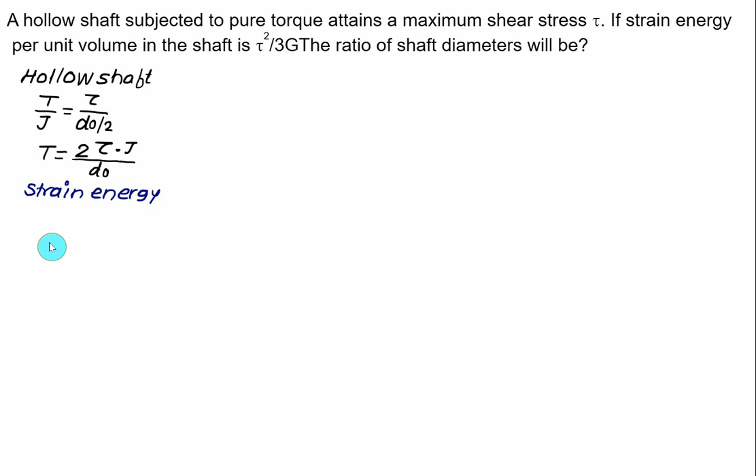Strain energy due to torsion is given as U is equal to 1 by 2 multiplied by T square multiplied by L divided by polar moment of inertia J divided by G. So let's substitute here. T is equal to 2 times tau into J divided by d0. So we get strain energy equal to 1 by 2 into T square, which is 4 multiplied by tau square multiplied by J square multiplied by L, and in the denominator we have d0 square, further divided by J and G.

So one of the J will get cancelled. We are left with one J in the numerator. This 2 also gets cancelled and we have 2. So we get strain energy equal to 2 times the shear stress square multiplied by J multiplied by L divided by d0 square multiplied by G. Now once we know the strain energy, we can calculate the strain energy per unit volume by dividing by volume, which is area multiplied by L.

So strain energy per unit volume is U divided by V, the strain energy density, equal to 2 times tau square multiplied by polar moment of inertia J multiplied by L divided by d0 square divided by G divided by volume, which is area multiplied by length L. So the length gets cancelled. Strain energy per unit volume is given as tau square divided by 3G, which is equal to 2 times tau square divided by G.

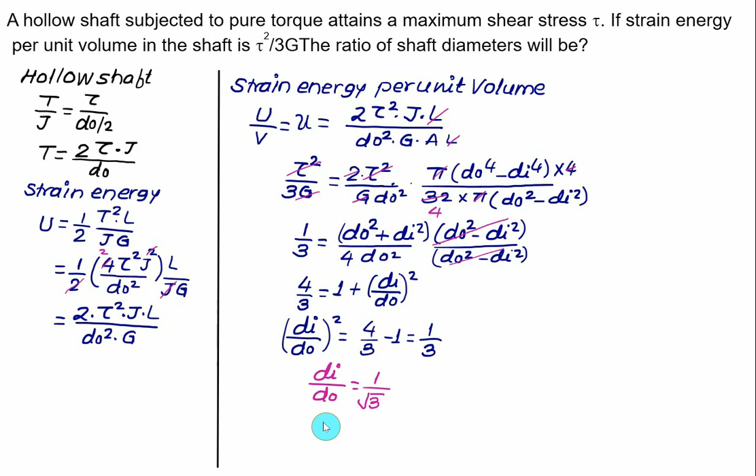A uniform torsion rod is subjected to distributed torque equal to T0, the torque per unit length. Derive an expression for the total strain energy stored in the rod. Express your answer in terms of T0, diameter d, length L, and the shear modulus G. So we have a uniform cross-sectional shaft of length L subjected to torque per unit length. Since the torque is variable, you have to use the method of integration.

We'll set the x-axis as the longitudinal axis here. At the fixed end, we have x equal to 0, and at the free end, x is equal to L. From the origin, we'll take a section at a distance equal to x. So we'll consider this section, and for this section, we'll find out the strain energy first. So this section we have taken outside.

This section is from the origin at a distance equal to x. Total length is equal to L. So the length of the given section is L minus x. This torque is acting in an anticlockwise sense, so you have to show here the internal torque. Let's represent the internal torque as Tx, which is a function of x. So Tx represents the internal torque.

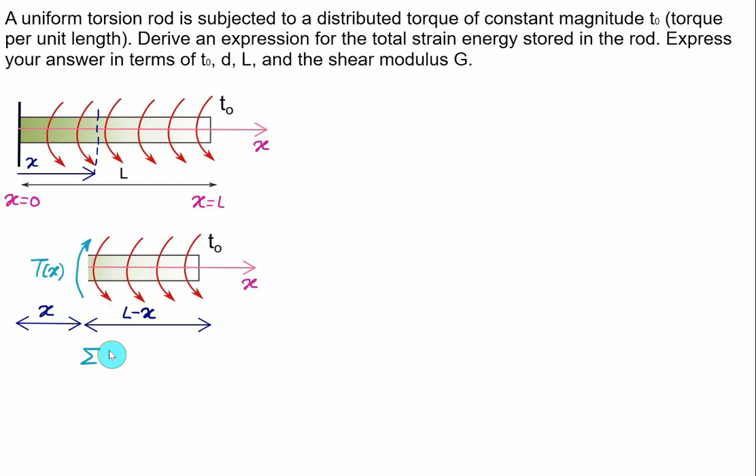To find the value of Tx, we take the sum of all torques equal to 0. Tx is a positive value if I consider clockwise as positive. In that case, the torque at any distance x is added over the length L minus x, so that is minus T0 into L minus x. This total sum must equal 0. So the torque at any section Tx will be equal to T0 into L minus x.

Since the torque is a function of x, we can calculate the total strain energy by integration. Total strain energy U equals the integral from 0 to L of Tx squared dx, divided by 2 times the polar moment of inertia J multiplied by the modulus of rigidity G. 2JG is a constant. Tx squared we can replace with T0 into L minus x, and T0 is also common. So the constant is T0 squared divided by 2JG.

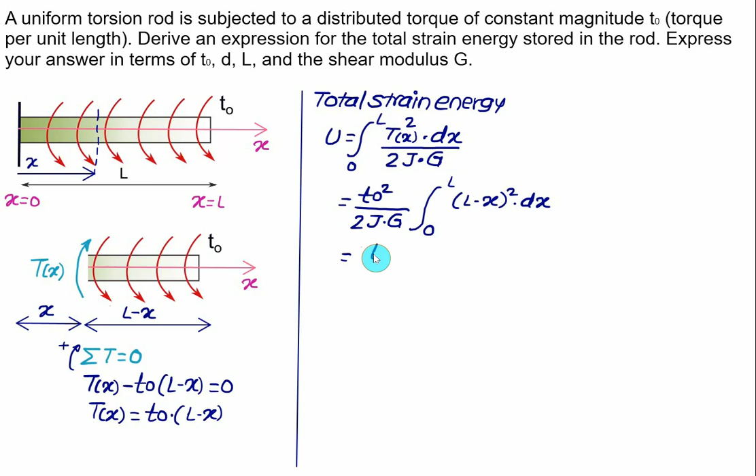Inside the integral, with limits from 0 to L, we have L minus x whole squared multiplied by dx. Integration of L minus x whole squared will be L minus x cubed divided by 3, divided further by the derivative of L minus x. So we get T0 squared divided by 2JG, times L minus x cubed over 3. The derivative of L is 0 and the derivative of minus x is minus 1, with limits from 0 to L.

So minus 3 times 2 gives minus 6. We get minus T0 squared divided by 6JG. At the upper limit L, L minus L equals 0, and at x equal to 0 we get L cubed. So the minus sign cancels, and in the numerator we get T0 squared multiplied by L cubed divided by 6JG.

J we can write as pi by 32 d to the power 4. So multiplied by pi, 32 shifts to the numerator, d to the power 4, further divided by G. Dividing both numerator and denominator by 2, the strain energy will be equal to 16 T0 squared L cubed divided by 3 pi G d to the power 4.

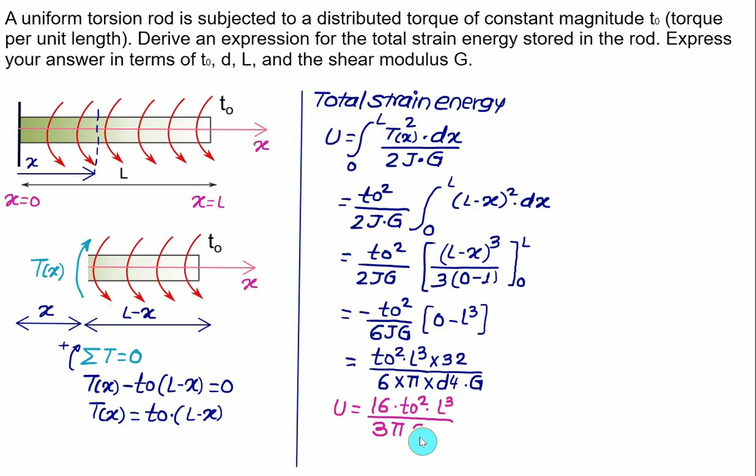A thin-walled circular tube and a solid circular bar of the same material are subjected to torsion. The tube and the bar have the same cross-sectional area and the same length. What is the ratio of the strain energy U1 in the tube to the strain energy U2 in the solid bar if the maximum shear stresses are the same in both cases?

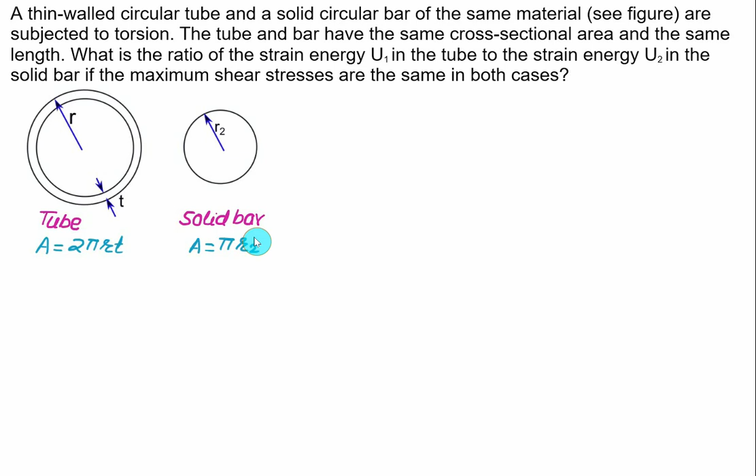In this case, we have a thin tube of radius r and thickness t. The area, which is the same for both tube and solid, is the circumference times thickness, equal to 2 pi r multiplied by t. In the case of the solid bar, the area will be pi r2 squared. These two values are identical for both the tube and the solid bar.

U1 represents the strain energy in the tube, and U2 the strain energy in the solid bar. U1 is given as T squared multiplied by L divided by 2 J1 G. G is also the same. U2 is given by the same formula, T squared multiplied by L divided by 2 J2 G.

For the thin tube, the polar moment of inertia J1 is equal to 2 pi r cubed multiplied by t. Whereas the polar moment of inertia for the solid shaft is pi by 32 into d to the power 4, where d is equal to 2 r2, to the power 4. 2 to the power 4 is 16.

So we have J2 is equal to pi into r2 to the power 4, further divided by 2. The value of tau max is the same in both cases, and for the tube we can write the torsion formula: T by J equal to the maximum value of shear stress divided by the radius r, which is the outer radius. So in this case we have torque equal to tau max multiplied by J, and J is equal to 2 pi r cube multiplied by t, further divided by r.

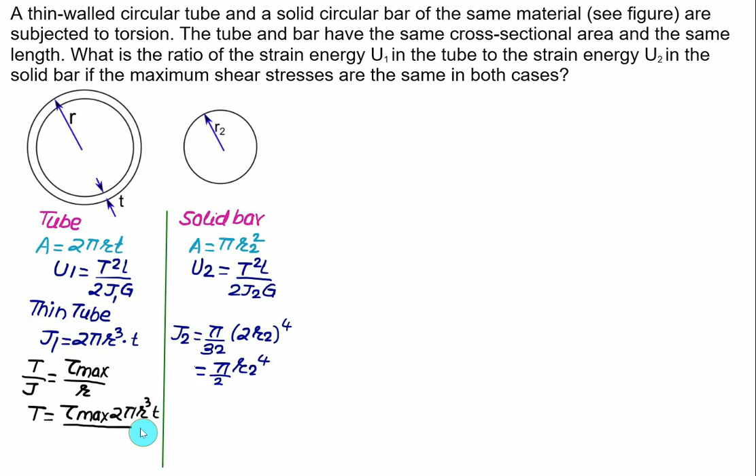That is, torque is equal to tau max times 2 pi r cube t divided by r. So torque is equal to 2 pi r square multiplied by t multiplied by tau max. In the case of the solid shaft, torque is again the same formula: maximum shear multiplied by polar moment of inertia divided by the radius. This time the radius is equal to r2.

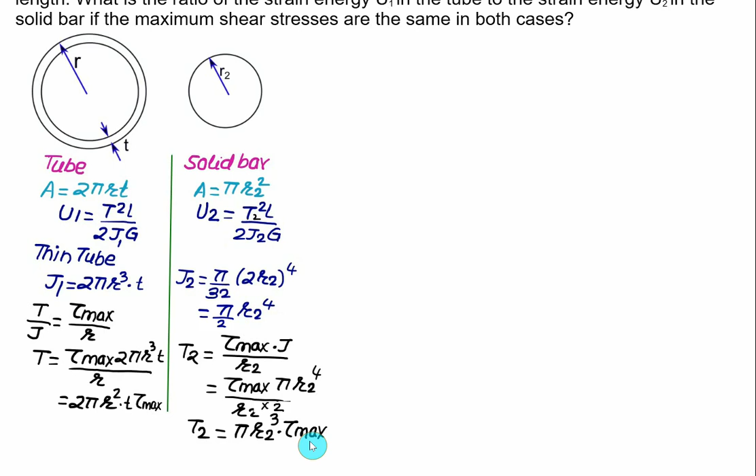So we have tau max times the polar moment of inertia, pi r2 to the power 4 divided by 2, divided by r2. So the torque in the solid shaft is tau max into pi r2 to the power 4; one r2 gets cancelled. We get pi into r2 to the power 3 multiplied by tau max, divided by 2. Length remains the same, and G also remains the same.

So we can calculate the strain energy in the tube using the U1 relation. U1 is equal to T square, that is 2 pi R square multiplied by t multiplied by tau max, squared, multiplied by L, divided by 2 J1 G, where J1 is 2 pi R cube t. So we get 2 square equal to 4, into pi square into R to the power 4, t square, tau max square, and length L. In the denominator, 2 into 2 is 4, then pi, R cube, t, and G.

Let's cancel out common terms. 4 is cancelled. Pi is cancelled, so one pi is left. R cube is cancelled, one R is left. t is cancelled, so one t is left. So U1 is equal to pi into R into t multiplied by tau max square, multiplied by length L, divided by G.

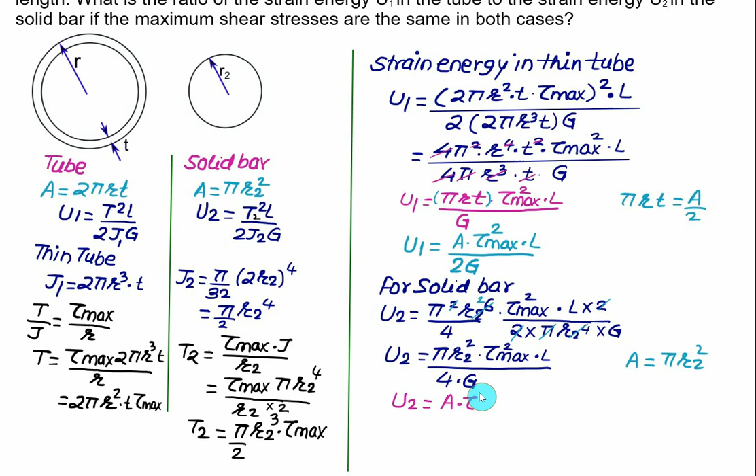Now pi gets cancelled here. This 2 and 2 cancel. R to the power 4 leaves R2 square. So U2 is equal to pi into R2 square multiplied by tau max square multiplied by length L, divided by 4 times G. Now pi into R2 square is the area A, which is the same for both sections, tube and solid. So U2 equals area multiplied by tau max square multiplied by L, divided by 4 times G.

If we take the ratio U1 by U2, area into tau max square gets cancelled, and the 4 shifts to the numerator divided by 2. So the required ratio of strain energy is equal to 2.